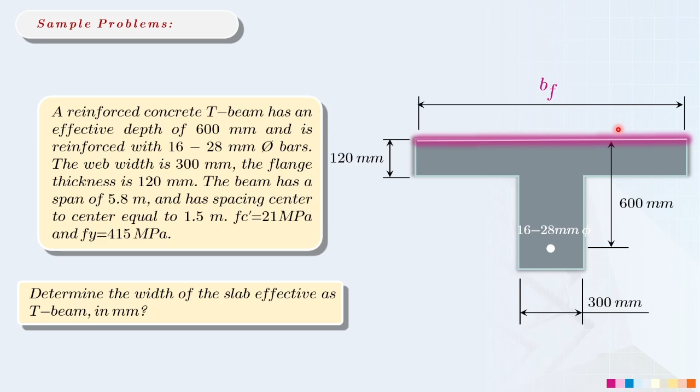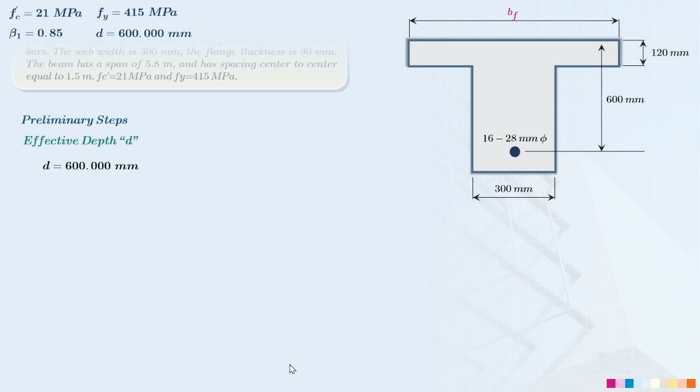So of course, ang first question natin dito, we need to determine how wide is the effective flange natin. Okay? So let's determine first in our preliminary steps, which is the effective depth. Of course, given na siya as 600 millimeter. However, our overhang flange here will be based on the configuration of our T-beam. Of course, our T-beam here is an interior beam. That's why ang i-consider natin ditong overhang flange width is dalawa.

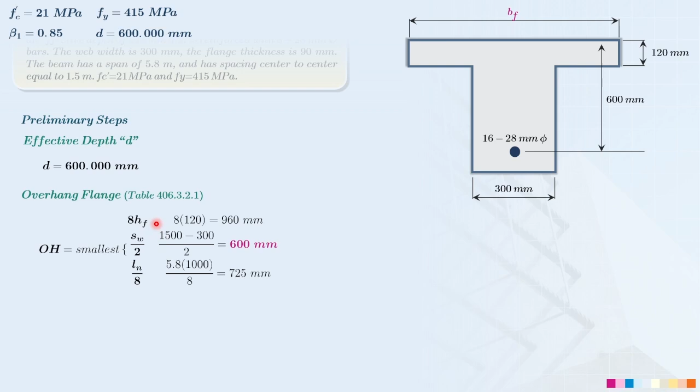So anyway, using this condition, which is first is 8 times the thickness of the flange, which is 8 times 120, ang lalabas dito ay 960 millimeter. While dito sa ating second condition, which is the clear spacing of the beams, then you need to divide it by 2. So given tayo dito ng center to center spacing na 1.5 meters. Kaya lang kasi ang kailangan natin dito ay clear spacing. That's why I will subtract it with the 300 millimeter, yung tigkalahati in each side. Kapag pinagsama mo siya, magiging 300 millimeters na po yun. Then, you need to divide it by 2 so that our second condition here is 600 millimeter.

Then, the last one is the clear span of the length over 8. So of course, given tayo dito ng 5.8 meters, kaso kailangan in terms of millimeter yung sagot natin. That's why I multiply it with 1,000. Over 8, ang makukuha natin dito ay 725 millimeter. Okay? So our overhang flange is now equal to 600 millimeter.

So para makuha natin yung total flange width, ang gagawin lang natin dito is we need to add the two pieces of the overhang flange, and then we will add also yung width ng ating beam itself. So by simply doing this one, ang makukuha nating effective width of the flange is now equal to 1,500 millimeters. Dahil itong flange width natin, magagamit natin yan when we are solving our ultimate moment.

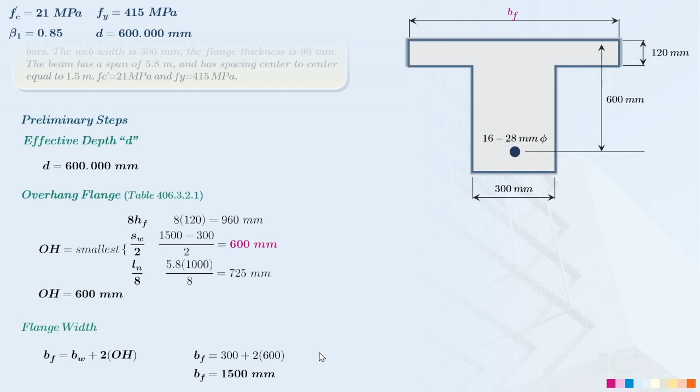So first, let's determine the area of compression block. Of course, magkakaroon tayo dito ng two cases of area of compression block. First, if the value of a will not exceed the 120 millimeter, so kapag dinerive po natin yan, magiging base of the flange multiplied by a.

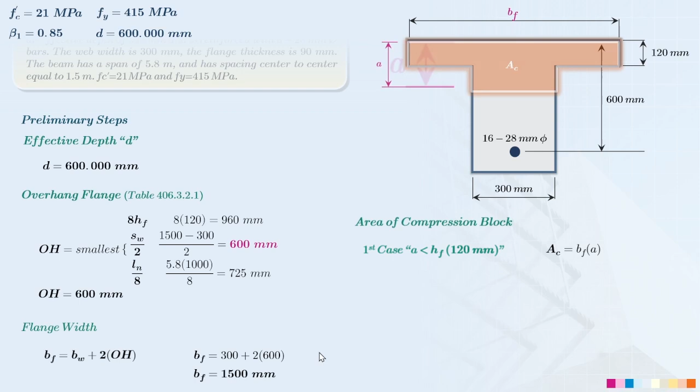The second one naman is kapag lumagpas na po yung value ng ating a sa 120 millimeters, which is this one. So of course, para ma-derive po muna yung general formula for the area of compression block, you need to multiply the width of the flange sa ating 120 millimeter. Para makuha mo yung area nung nasa baba, kunin mo muna yung difference between a and 120 millimeters. Then para makuha mo yung area, just multiply it with our width. So ito yung gagamitin natin dito.

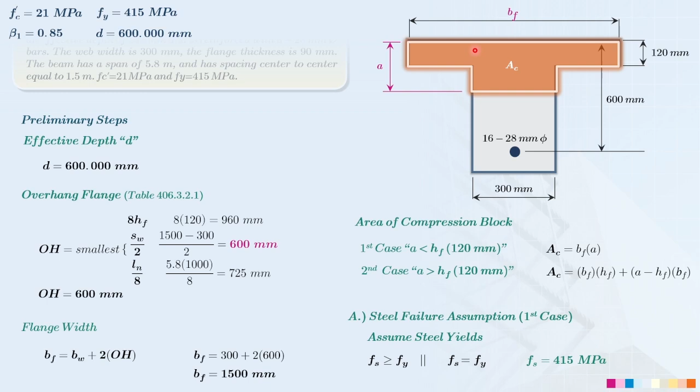Okay. So let's have the first step natin sa pagdetermine natin ng ultimate bending moment. So first, steel failure assumption tayo, which is I will assume here that the steel will yield. At the same time, I will assume that this is under case number 1. Ibig sabihin lang po nun is hindi po lalagpas ng 120 millimeters yung magiging value ng a ko.

Okay? Ngayon, let's proceed now in using the equilibrium compatibility. So of course, I will direct substitute yung aking area of compression, which is a times width of the flange. So makukuha kong value ng a dito is now equal to 152.702 millimeters, which is greater than 120 millimeters. Ano ang ibig sabihin niyan?

So ano lang ibig sabihin niyan? Ang ibig sabihin po niyan is kapag namali na po tayo or mali yung assumption natin doon sa case na yon, kailangan natin mag-switch up on the other cases. So this time around, I will use the second case, which is dapat yung value ng A, it should be more than the thickness of the flange of 120 millimeters.

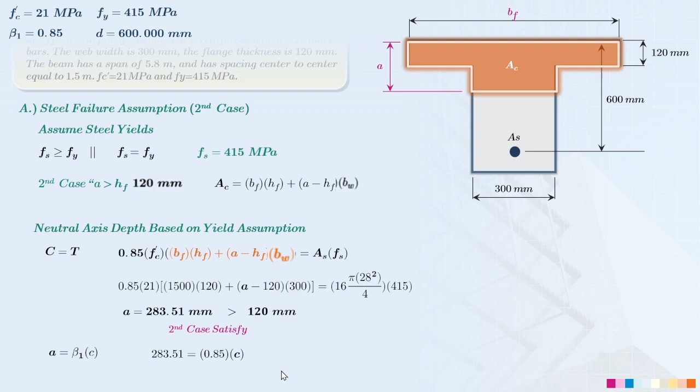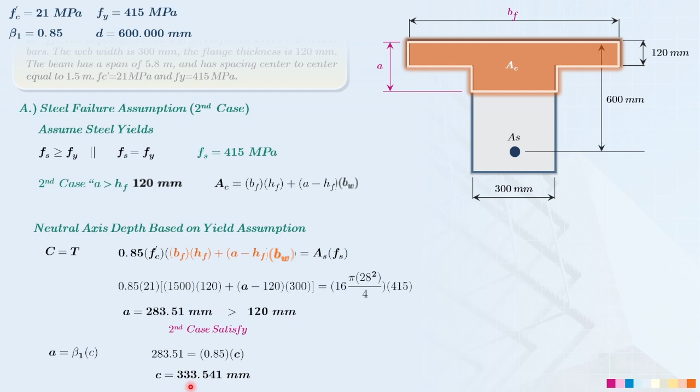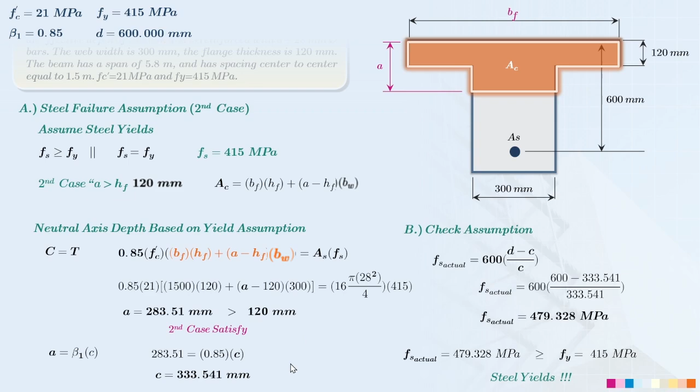Ang makukuha nating actual value dito is 479.328 megapascal. In comparison with our 415 megapascal, the yielding strength, ibig sabihin po niyan still yields. Another interpretation dito is tama po yung naging assumption natin sa reinforcement and also sa ating case for our area of compression. So, ibig sabihin lang po niyan, pwede na tayong kumuha ng ating bending moment.

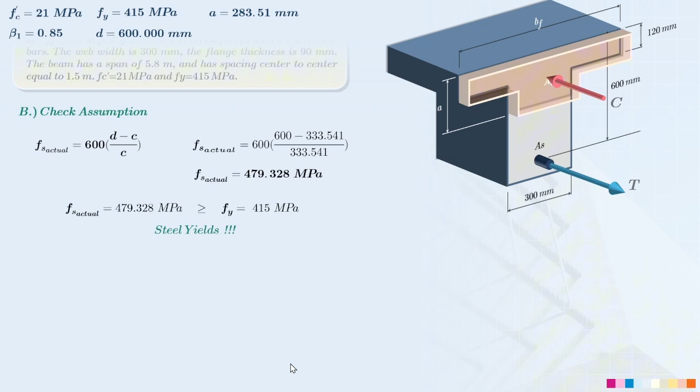Kaso, pagdating natin sa ating bending moment, we will consider here two parts. Kasi ngayon, itsura ng ating area of compression dito is composite area na po siya. So first, let's determine yung ating strength reduction factor. So yung value natin ng 479.328 megapascal, this is between 415 and 1,000 megapascal. So ibig sabihin lang nito, this section is now under transition controlled section. So kailangan natin gamitin itong formula na ito para makuha natin yung value ng ating strength reduction factor, which is 0.683.

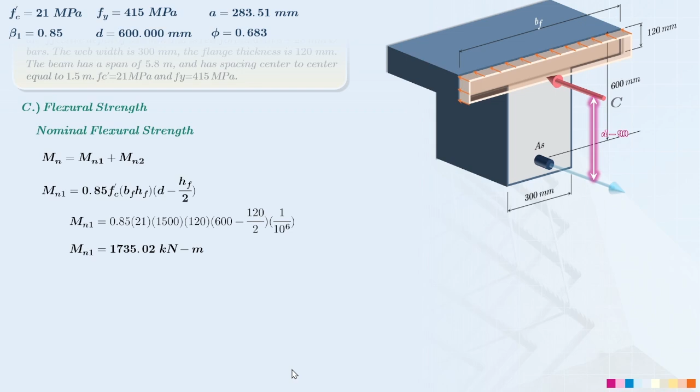Alright, so kunin muna natin yung nominal strength ng ating flange section. So by simply doing this one, yung equation na na-derive natin earlier, let's substitute everything and also consideration ng ating moment arm. So ang makukuha nating first nominal strength dito is 1,735.02 kilonewton meter. The second one is yung nasa web section, itong nasa ilalim natin. Okay? So, we will consider this equation. So, yung nasa baba na yung consider natin.

At kapag sinubstitute natin dito, ang makukuha nating second value of the nominal strength is equal to 348.701 kilonewton meter. So, kapag pinag-add mo yung dalawang nominal capacity natin, ang makukuha nating value dito is 2,083.721 kilonewton meters. Kapag na-total na natin sila, we can now determine the design flexural strength. Para makuha natin dito yung ultimate strength, i-multiply mo lang siya with our strength reduction factor. So our answer here for the moment capacity of this section, this is now equal to 1,423.293 kilonewton meters.